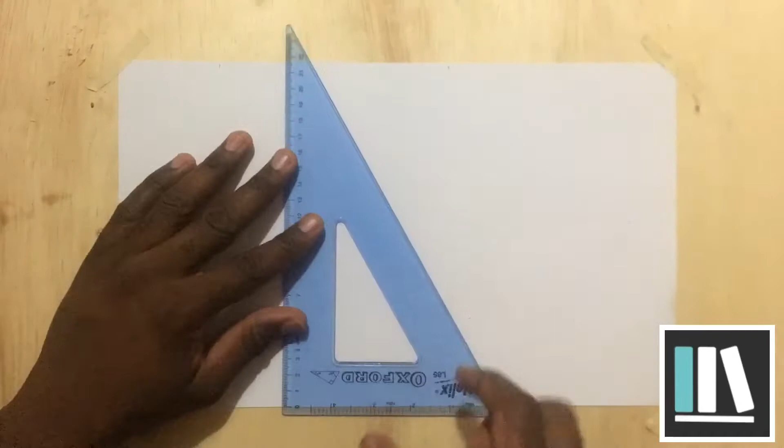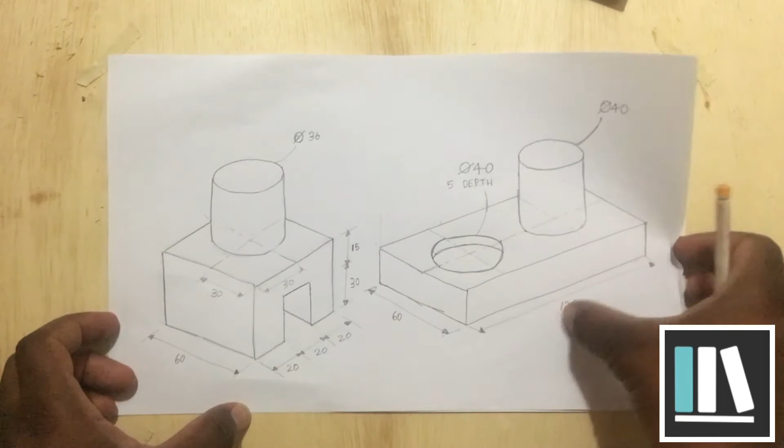Okay, so these are the drawings that we are going to look at today. We are going to start off with the drawing on the left, which is the simpler drawing of the two. So let's begin. I'm going to draw the simpler part of the shape first, which is the square portion.

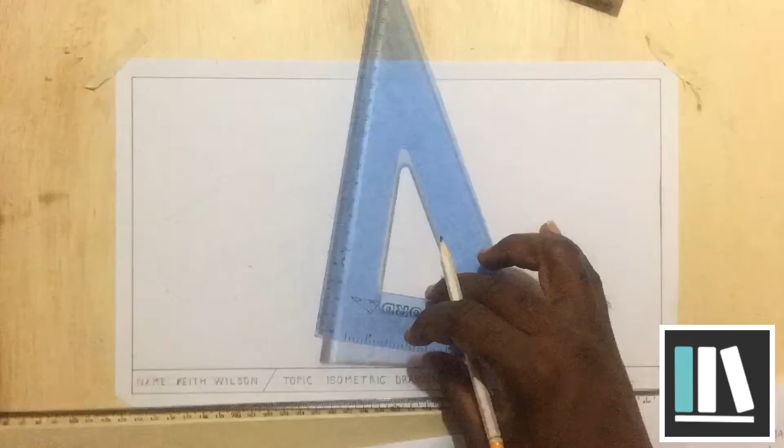So in the interest of time, I have drawn the shape. I have not demonstrated the drawing of the shape. If you want to brush up your skills on drawing simple isometric drawings, go ahead and watch the few videos before in this series. So let's go ahead and draw the circle.

Okay, so in the first two episodes of TD 202 that illustrated the drawing of isometric circles, I made reference to the fact that whenever you're drawing isometric circles, the first thing that you should do is to draw an isometric square that is equivalent to the diameter of the isometric circle, meaning one side of the square should be equivalent to the diameter. Then you would proceed to divide the square into 4 quadrants or 4 equal parts.

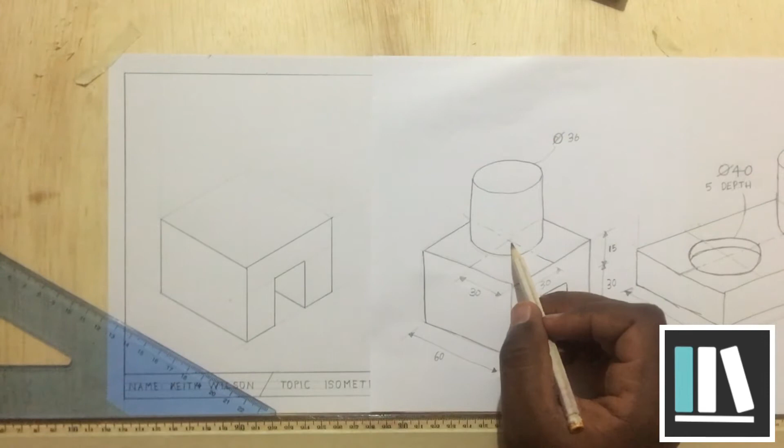In this case, the reverse will be done because, as you can see, if we are to draw the square, we would not know where exactly to position the square. But what we do know is the center of the circle, which would be the center of the square. So in this instance, we will proceed to find the center of the square first, which would essentially provide the dividing lines for the square.

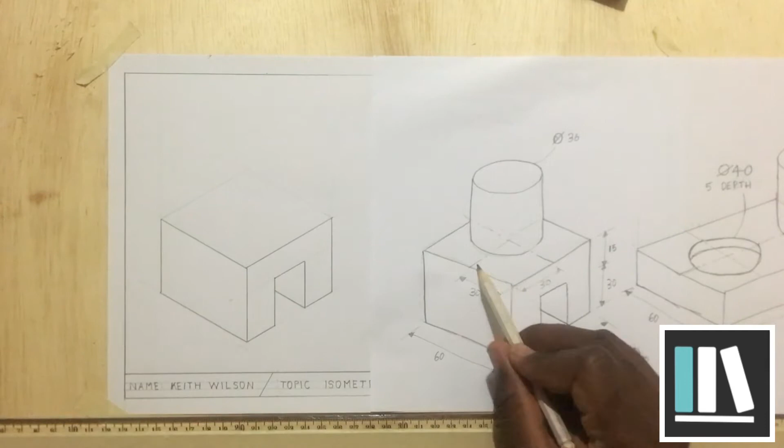So as I can see here, my center lines are 30 millimeters respectively from this point. So I'm going to measure 30 millimeters, which is around halfway. In some drawings, they may not give these measurements, and you would be left to assume that these lines fall in the center. These lines are not necessarily showing the center of the square object, they are just showing the center of the circle. I'll explain why that is.

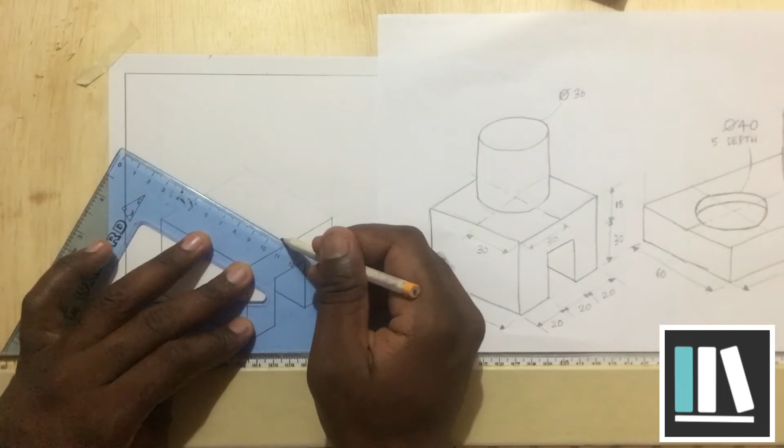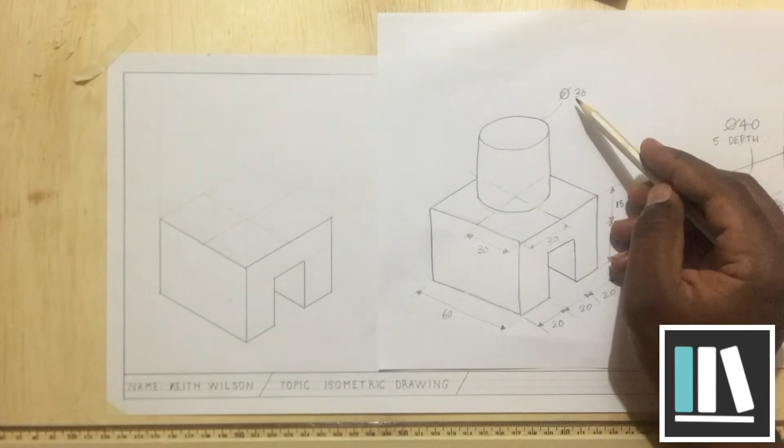So once I have established the center of the isometric square, I will now proceed to draw the isometric square. Now this is what you should do when you have the center. From the center, since the isometric square should be 36 millimeters in diameter, meaning one side of the isometric square should be 36 millimeters, by the way, this is the diameter sign, you should measure half of that measurement from the center. So half of 36 is 18.

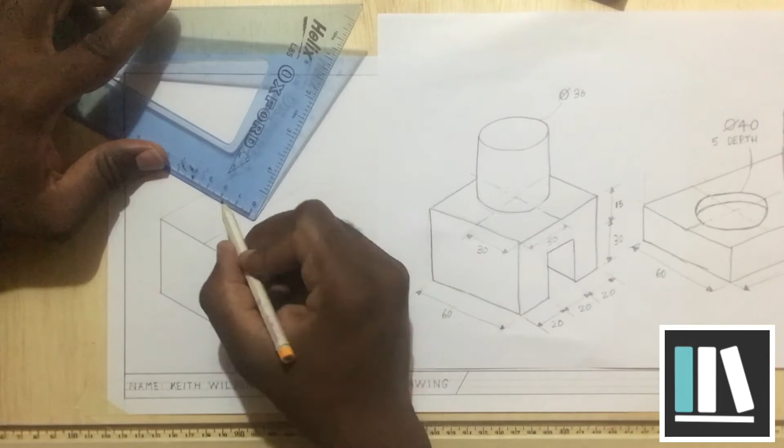And you are going to do this on all 4 lines branching from the center, so in all 4 directions, that is. Now this is where you have to be very, very careful that you're measuring exactly from the center. And you have to also ensure that you're marking off the points with precision.

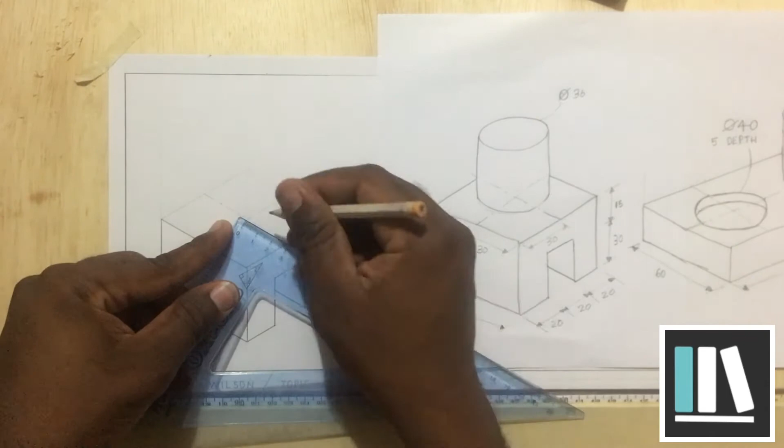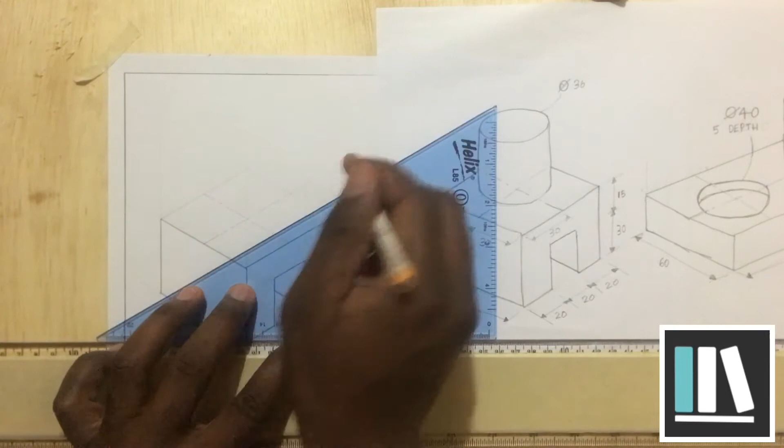Okay. Now that I've marked off all the 4 points, I'm going to use these 4 points to create the square. Please note I'm not connecting the 4 points. I am drawing parallel lines to the center lines that were established before. So parallel lines here, parallel lines here, parallel lines here, and another parallel line here. So if you notice, these 2 lines are parallel to this center line. These 2 lines are parallel to this center line.

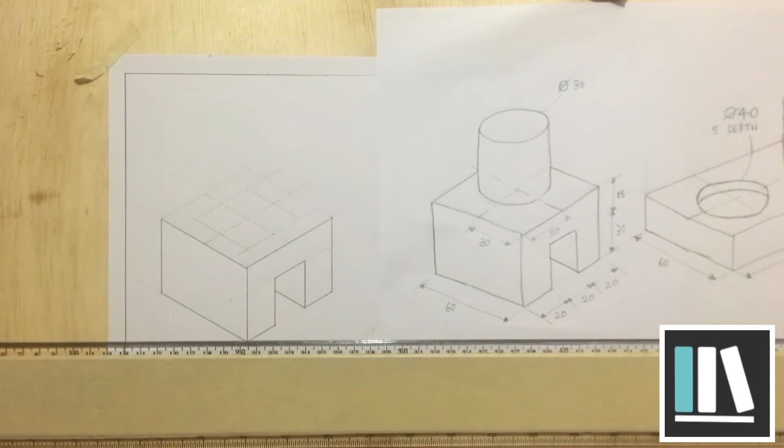Once you have established the square, normally the next thing to do is to establish the center of the square, or divide the square in 4 quadrants. But if you realize, that has already been done by virtue of establishing the center lines to begin with. So I can skip that step now and move on to constructing my isometric circle within my isometric square. In the last episode, I did just that.

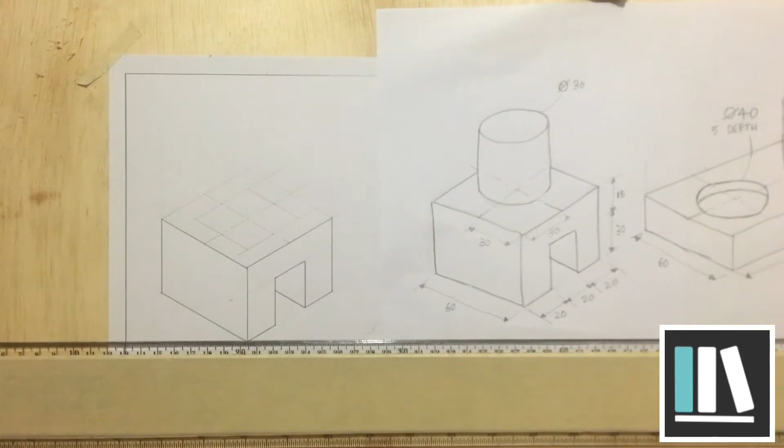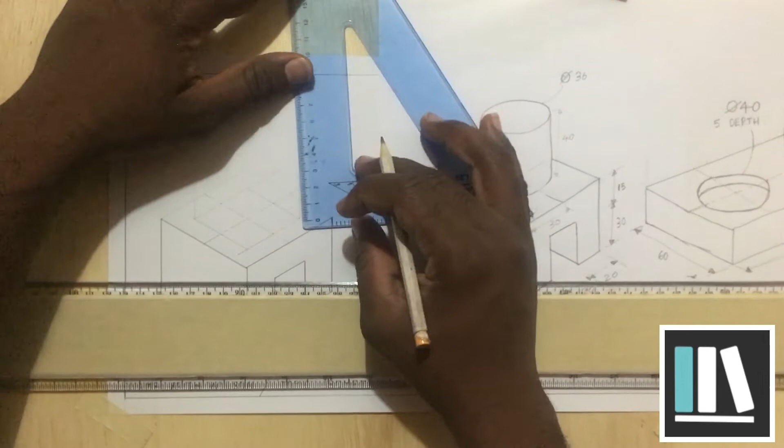This time around, as I mentioned in the last video, you can proceed to draw the top circle first rather than the bottom circle of the cylinder by projecting the lines upwards for the isometric square. And I'm just realizing that I did not establish a height for the cylinder. I'm going to assume a height of 40 millimeters. Once I measure it on both sides, 40, I can transfer measurements to complete this cylinder.

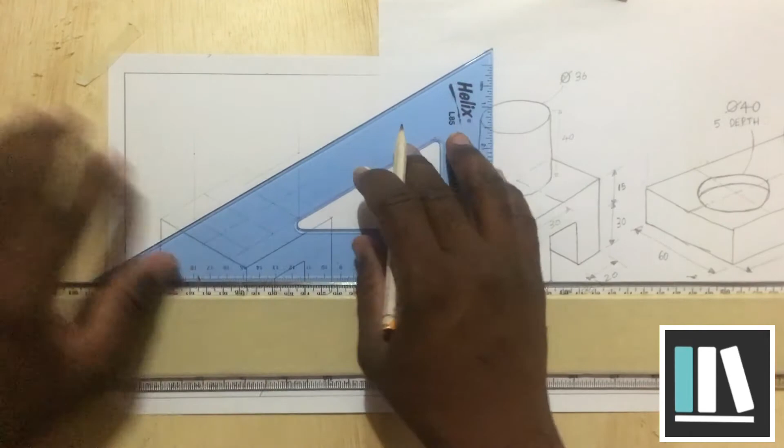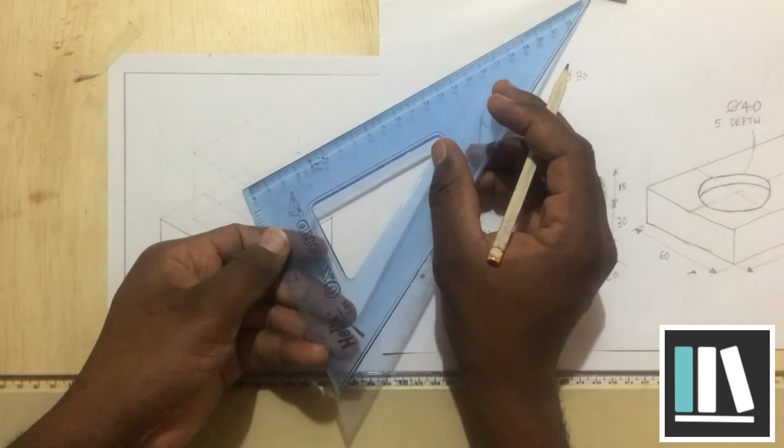This time around, the top circle for the cylinder is not going to clash with the bottom circle, as you can see here. Now for this circle, you have to establish the center, or divide the circle in 4 equal parts. So this is 36. Half of 36 is 18. And then 36. Half of 36 is 18.

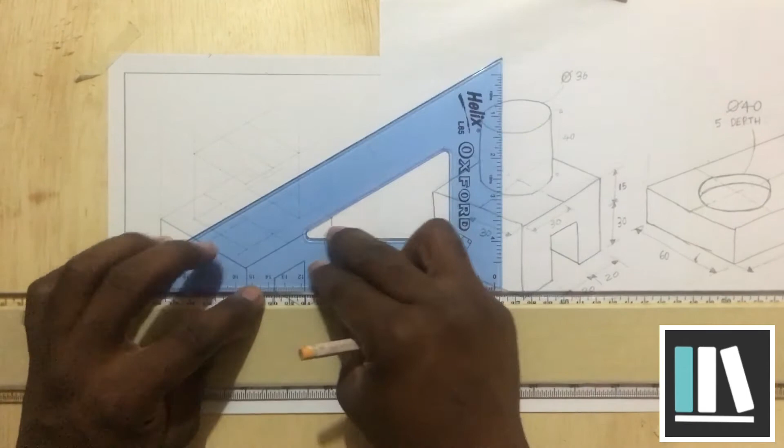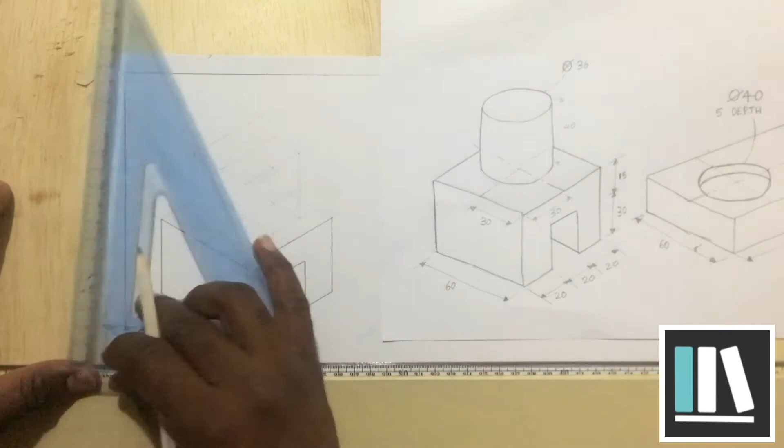Now, in the last episode I used the A pattern. This time around I'm going to use the V pattern to demonstrate that it doesn't matter which pattern you use. So I'm going to firstly connect my diagonals, and it should be the longer diagonal that you're using. Then I'm going to draw my V pattern.

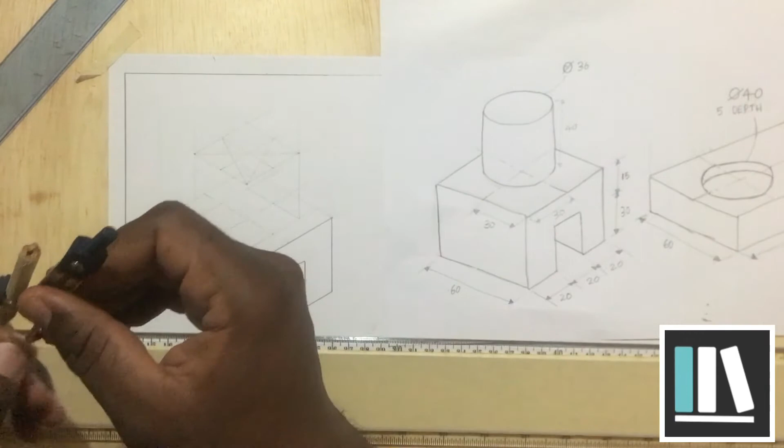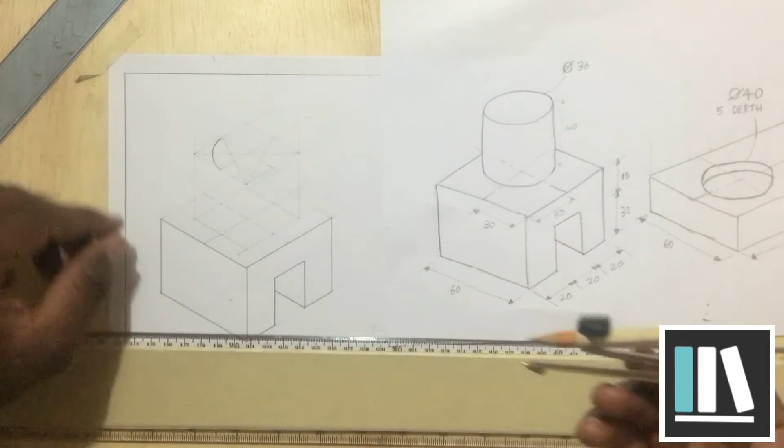Now these 2 points are the points that I'm going to use to draw the isometric circle at the top. I normally like to draw the smaller arcs first, then proceed to draw the larger arcs. Now, if you notice, the arcs are smaller in radius, which can be difficult to reproduce, especially if your compass is not up to par. This is where the bow compass will excel.

Seems like I'm not getting the compass to open as I want it to. The next thing to do is to draw the larger arcs.

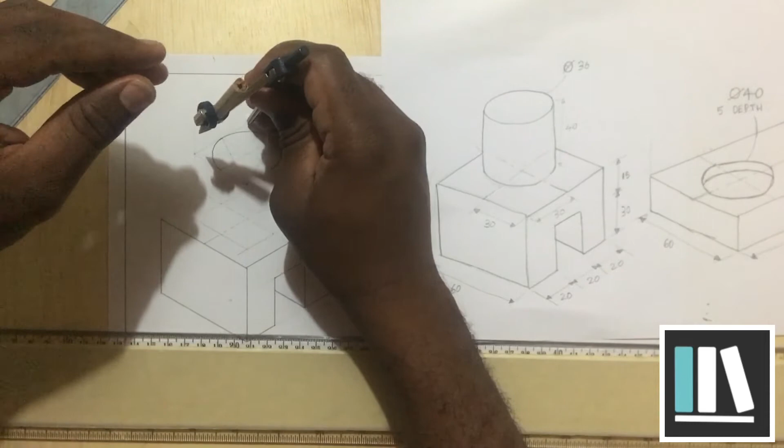And for this portion of the drawing, you can review the previous video in this video series that will show you how to draw isometric cylinders.

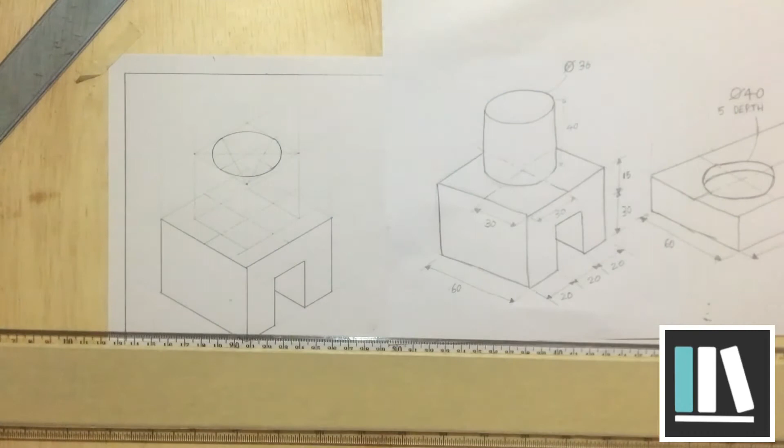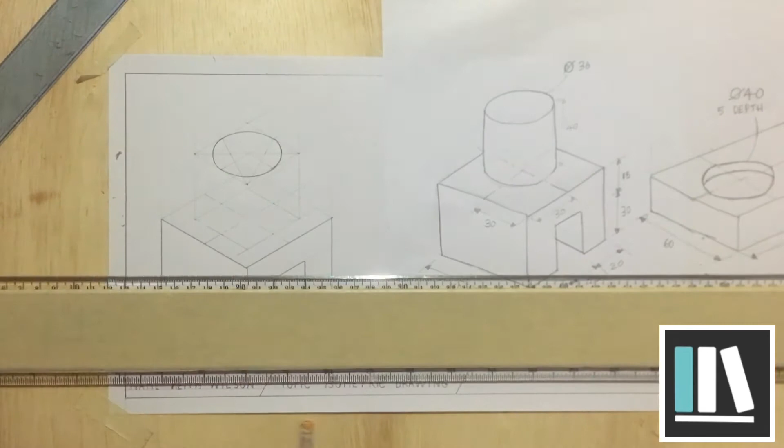Okay, so I am going to proceed to transfer down the measurements, but not before establishing the circle at the base. And I've drawn this line incorrectly. Let me redraw. I'm also going to use the V pattern, just for the sake of uniformity.

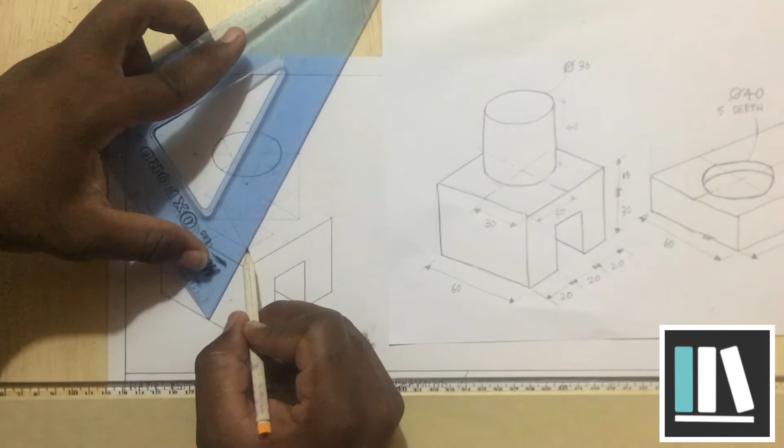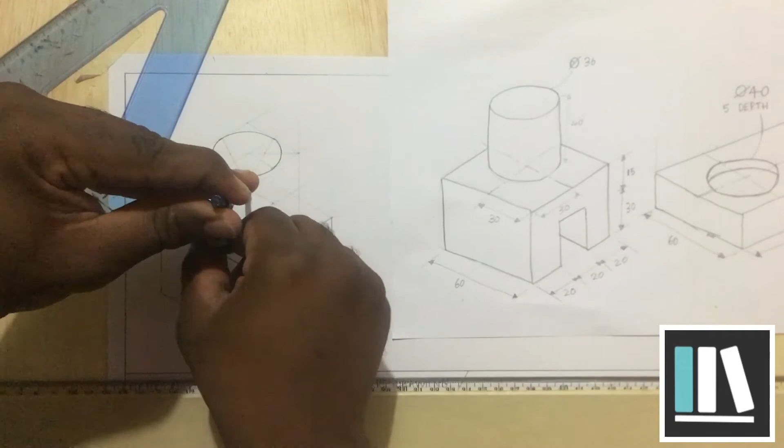Now, for this part of the drawing, I am only going to brighten the lower portion of this particular arc, but I still have to ensure that it would touch the upper point. All right, next side. Then I'm going to use the point at the top. And please note, I have no need to brighten all the arcs for the circle. I am only going to brighten the portion that I need.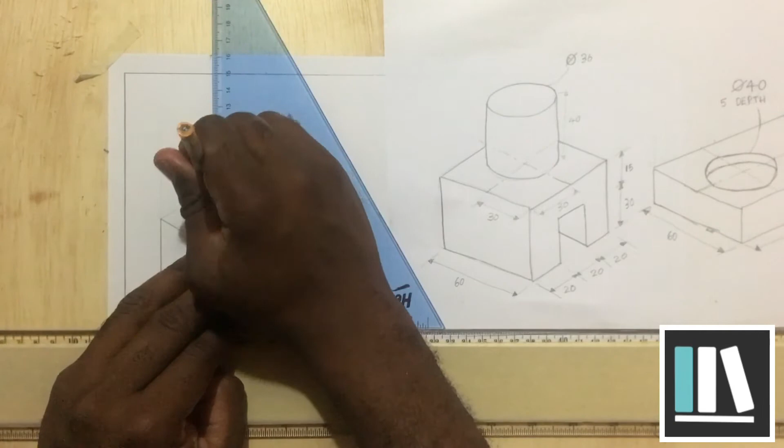Now I can proceed to brighten the rest of the shape. Now, if you notice, before drawing the cylinder on top, I brightened a portion of the shape beforehand. I am imploring you, if you are just learning, refrain from doing so until you have successfully constructed the drawing, because you may brighten a portion by accident that you may have to erase, which will result in your work being untidy.

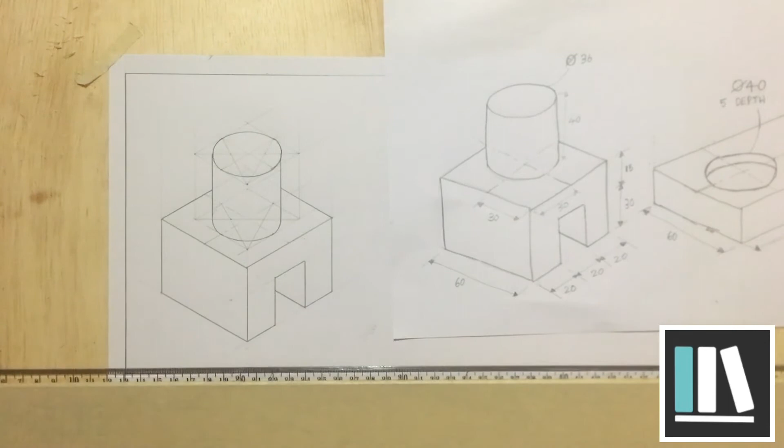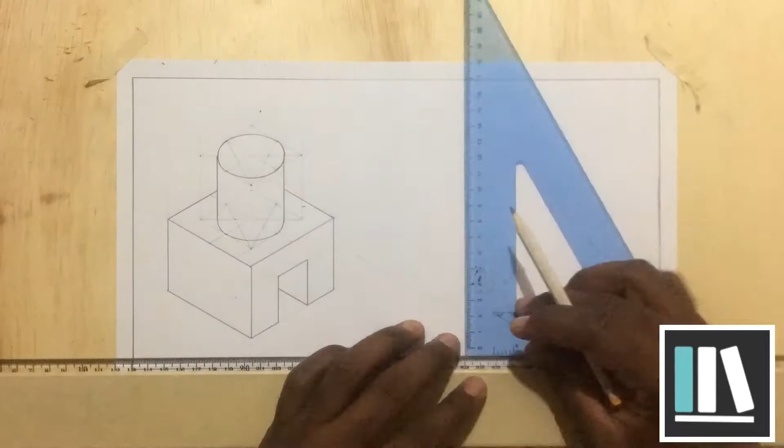Now this is the first shape. I am going to draw the second shape. So I'm going to quickly draw the base, which you guys should already know how to construct. So here is my second shape. Well, the portion of the shape that doesn't involve constructing isometric circles.

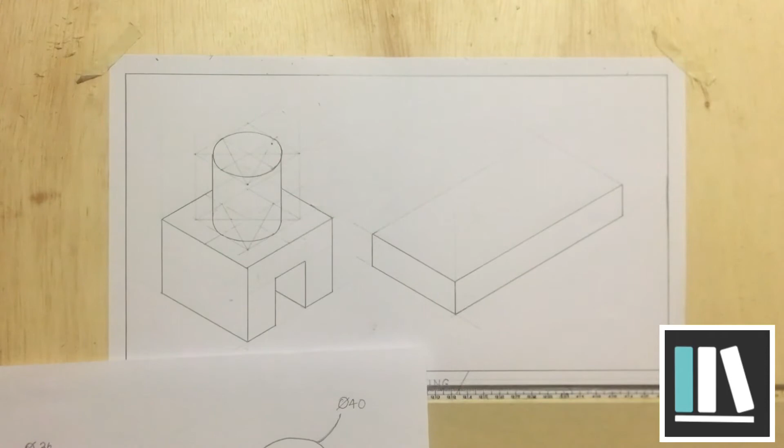Now, as before, the first thing I'm going to do in this instance, rather than drawing the isometric square, is to establish the center of the circle, which will essentially be the center of the square. And as I've explained before, we cannot draw the square first in this instance because we would not have known where exactly the square should be positioned. We can only determine the center of the square by finding the center of the circles as illustrated by the center lines.

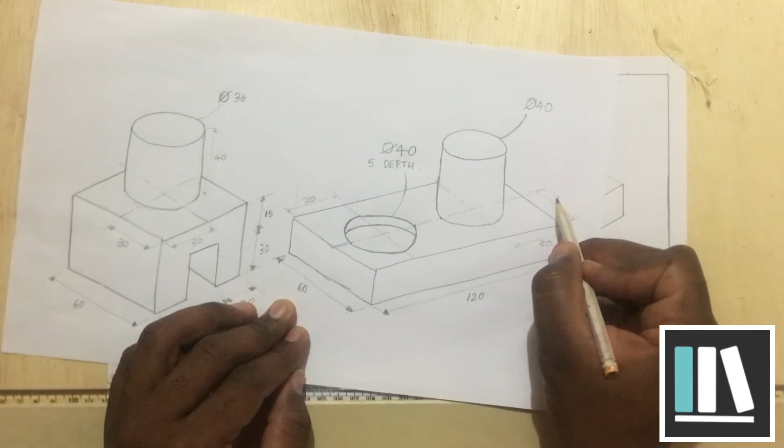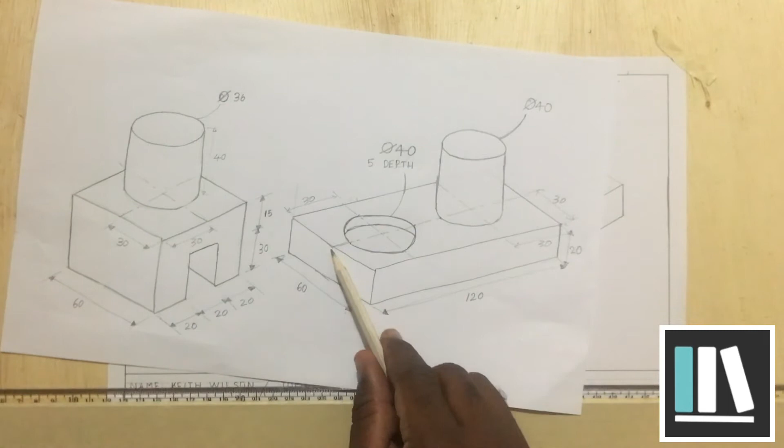So for this exercise, this will also be 30. As well. 30. Now, in instances like these, you will be given the distance of the center line from a particular edge. But as I've said before, if you are not given that distance, you must assume that the center line is splitting the object in half. For example, I could have left off this dimension, and you would have to assume that this center line runs through the halfway mark of the object, right? For the other side, it would have to be given.

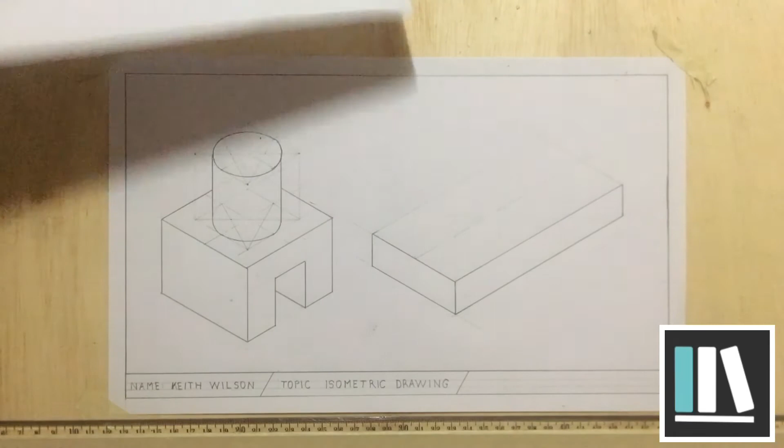Okay, so I'm going to proceed to draw my center line. So I'm measuring 30 millimeters from either edge, doesn't matter. It's equal, so I can do that. If it wasn't equal, then I would have to choose the edge where the measurement is showing. Then from both edges, I'm going to measure 30 millimeters. Then proceed to draw my center line.

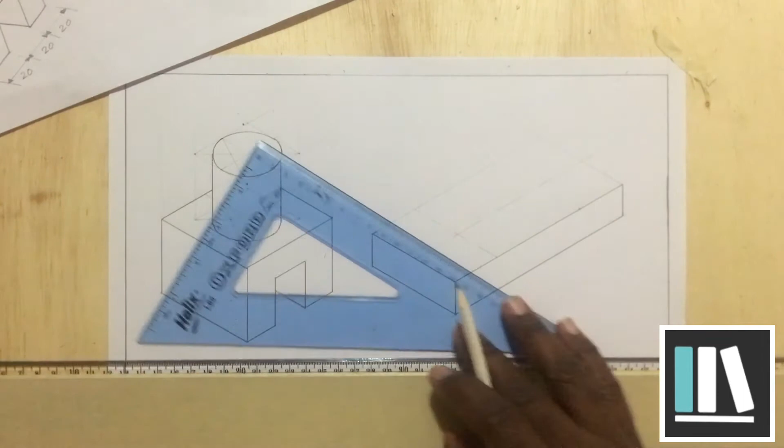Now I'm going to show you something, and this is what you should look out for when you are drawing. I am kind of drawing in a hurry, so as to make this video as short as possible. So in the process of rushing, this line is not going through this point, which it should.

This is an isometric square, if you realize, 30 millimeters, 30 millimeters. So any vertical line that is going through the shape would be the diagonal, which means it should touch the top point or the bottom point. And since that is not happening here, this proves to me that my shape is not drawn symmetrically or drawn accurately. Therefore, I may encounter some errors down the line.

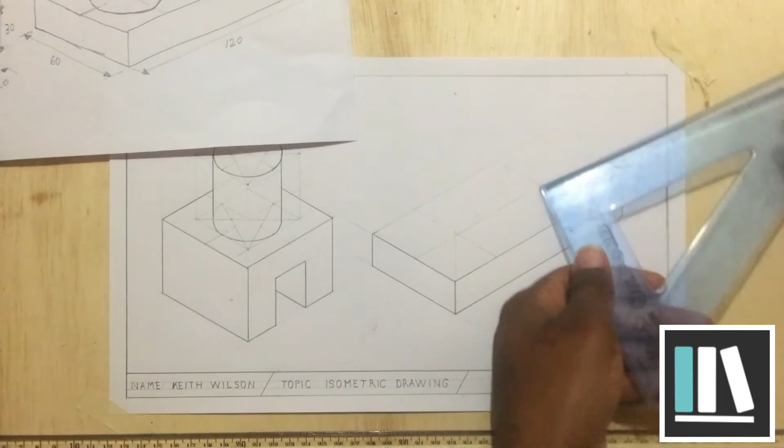Now that I've established the circle centers, just like the last time, I'm going to find the square that is supposed to surround that center. And since in this instance one side of the isometric square should have a diameter of 40 millimeters, I'm going to proceed from the center to measure 20 millimeters on either side of the center.

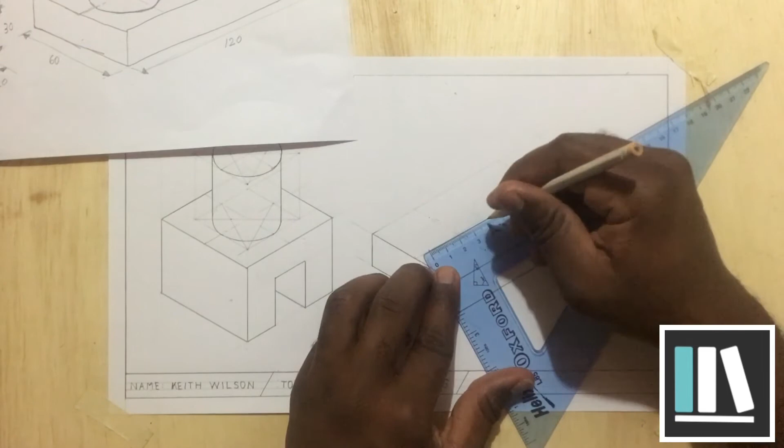I'm going to do them for both circles. So from this circle center, I'm measuring 4 points 20 millimeters away from the center. And I hope you can see my points. Once I've established my points from the center, let me put them a bit brighter so that you can see. I would normally not brighten these points so much as they will affect the drawing, but I want you guys to see them.

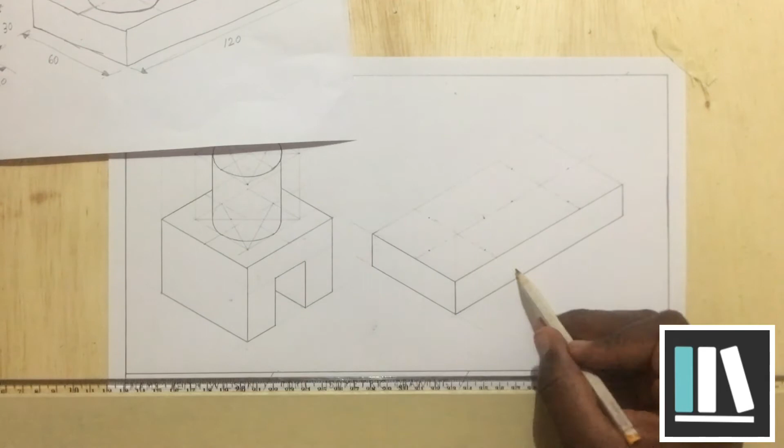Now that I've gotten these points, these 2 points will be parallel to the center line, while these 2 points will be parallel to this center line. Please refrain from connecting the points to form the square. So I'm going to draw parallel lines. And since I have the set square in this position, I'm going to go ahead and do these as well. Flip.

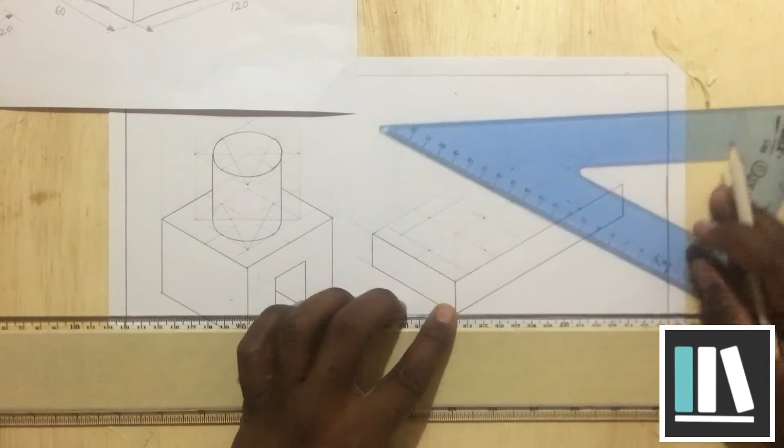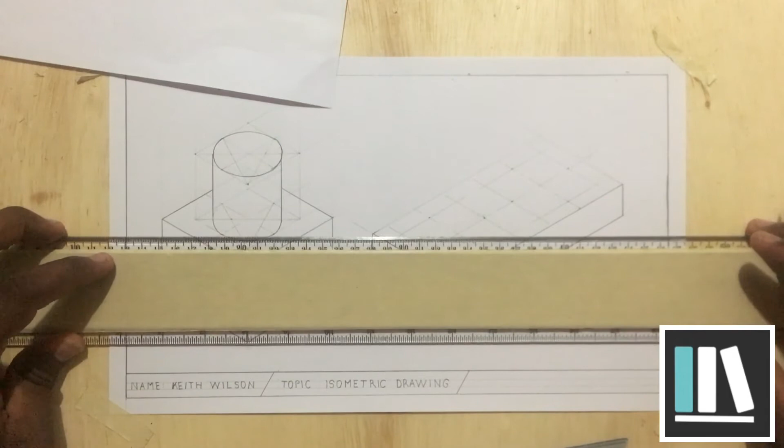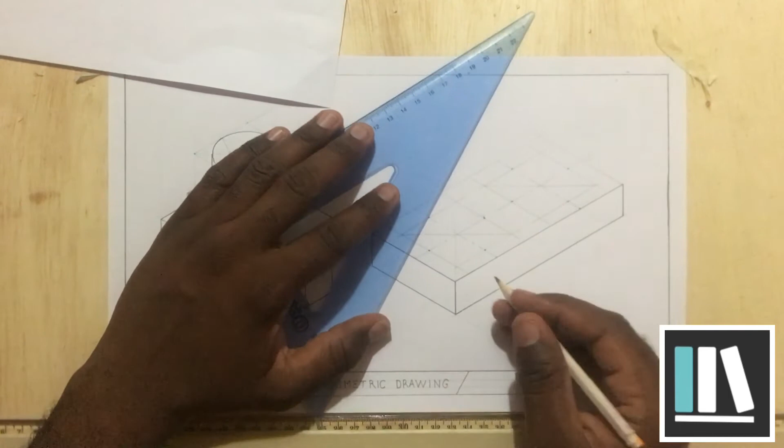Okay, now I have one square, I have another square. I can now proceed to draw the patterns. This time around, I'm going to use the N pattern that I was telling you about. So, I'm drawing my diagonals. I can draw them for both. Right? This is drawn incorrectly.

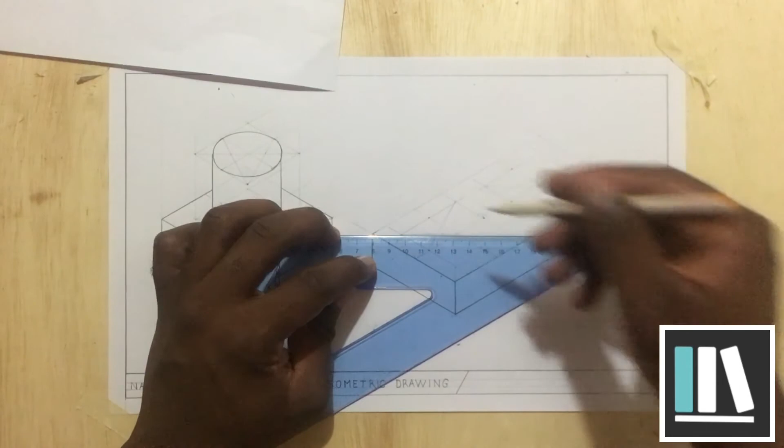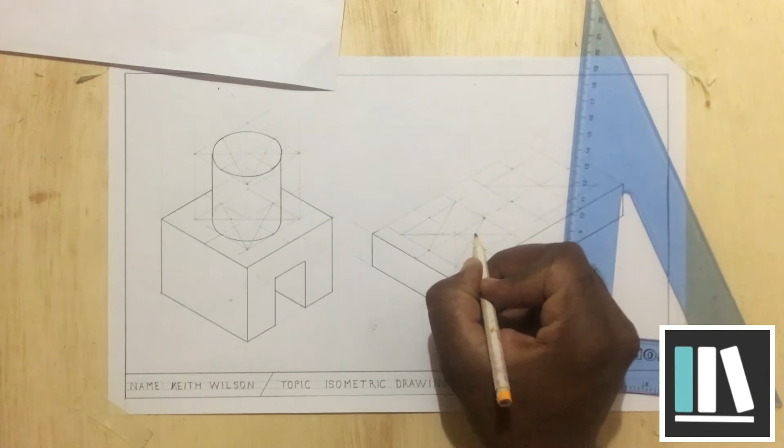And as much as possible when you're drawing, please refrain from drawing double lines. I'm struggling here at the moment because of the lighting. The shadow is blocking my vision. Now you can see the N pattern here. Now these are the 2 points that have been established. I'm going to do the same thing here. Now, in drawing the N pattern, this line will not be necessary. I'm just going to draw it just to make the N.

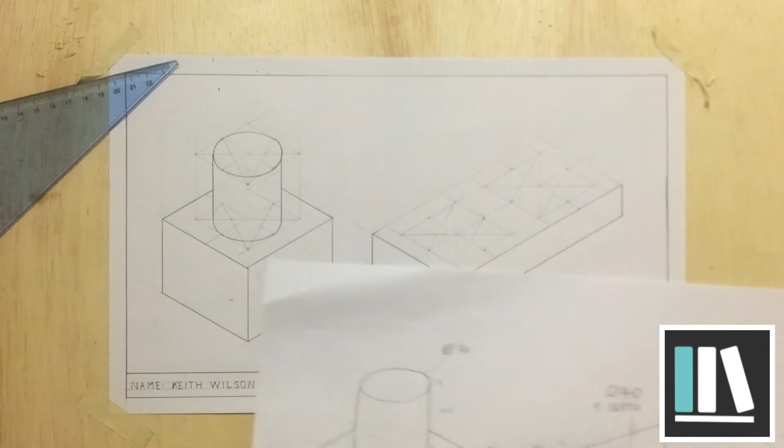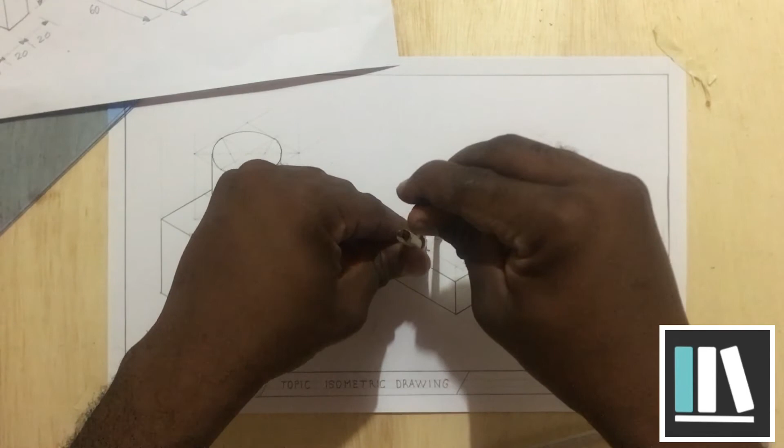Okay, so now that you have established the N pattern, you are going to proceed to draw the circles. Bear in mind that this circle, you don't need to brighten it, so you can replicate the method that I was showing here. I'm going to proceed to draw the front circle, or the circle that doesn't have the cylinder. I can brighten the entire circle in this instance. And as I said before, you don't have to start with the smaller arcs. You can proceed.

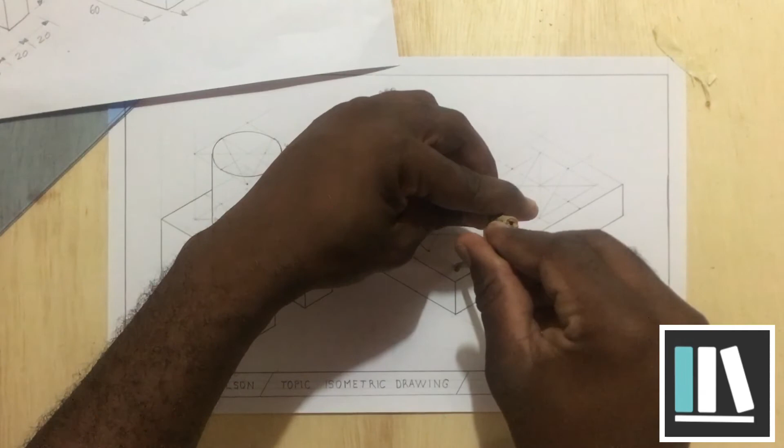So these points that I've established, where the lines from the N pattern intersect with the diagonal for the square, you use those for the smaller arcs, and you use the opposite points on the square to draw the larger arcs. So the N pattern really is only established to draw the smaller arcs. You don't need the N pattern for the larger arcs. I keep on saying circles, I should say arcs, because there are 4 arcs that are drawn together to form the isometric circle, or the ellipse.

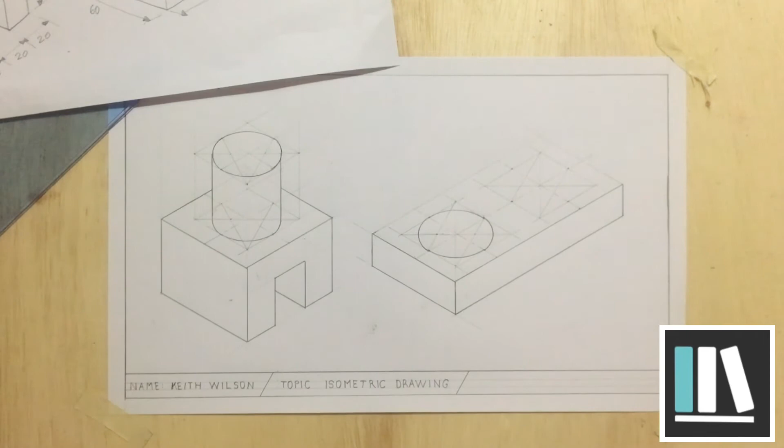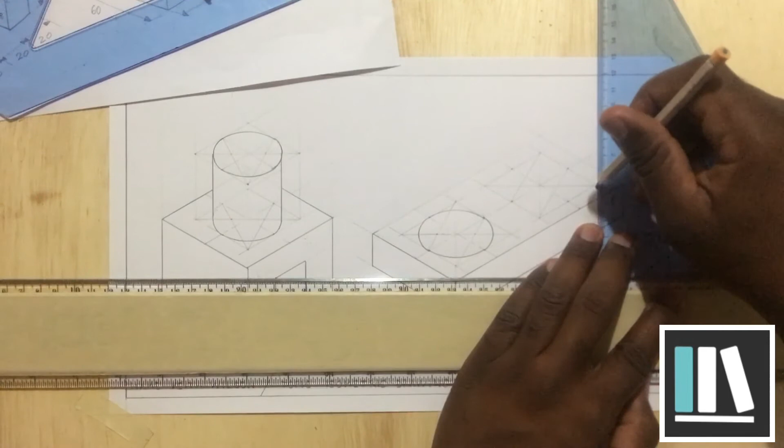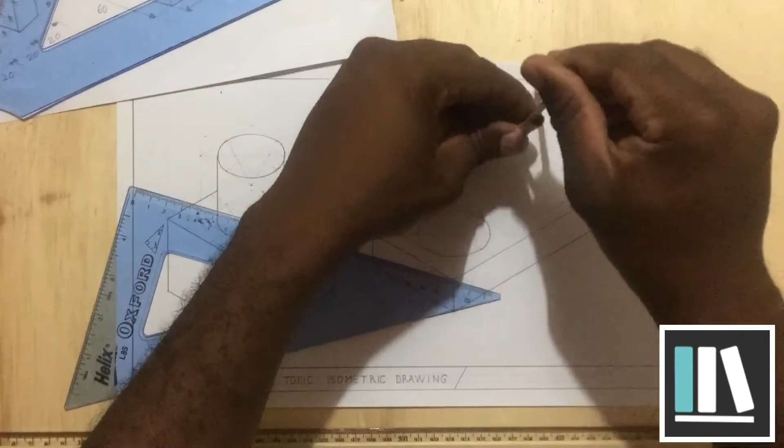Now I've drawn this circle, and there's something that I want to demonstrate, but not before drawing the cylinder at the back. I'm going to leave that for last. And I'm going to proceed to transfer these measurements. Okay, I'm just going to breeze through this because it's the exact method. Okay, so I've almost completely drawn the shape. This height wasn't given. I've just decided that it is 40 millimeters.

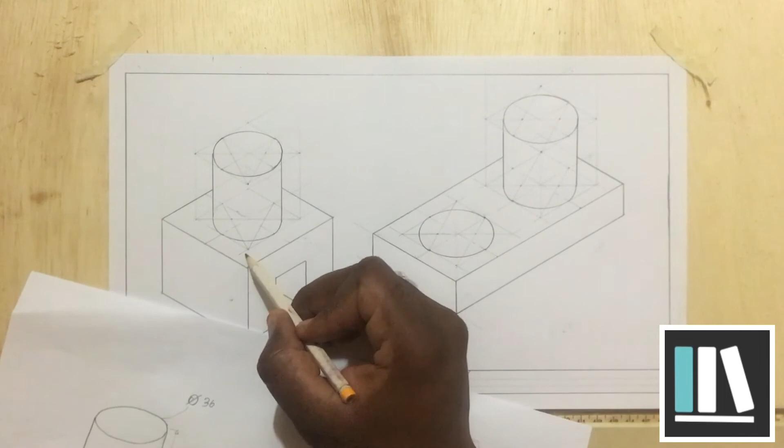Now, there's something I want to point out quickly. In drawing a cylinder, if the diameter of the circle is the same as the height of the cylinder, both isometric squares will meet, right? And they will not collide. If the height of the cylinder is larger than the diameter of the circle, there will be a space in between, as in the drawing yesterday. If the height is smaller than the diameter, then the squares for the cylinder will collide.

So you can use that as a guide to determine if your drawing is accurate. Now, let's proceed to draw the final circle. Now, we could have gone ahead and projected some lines downwards. Now, this is the depth. Because this is the depth of this hole, this circle shares the same diameter as the circle above.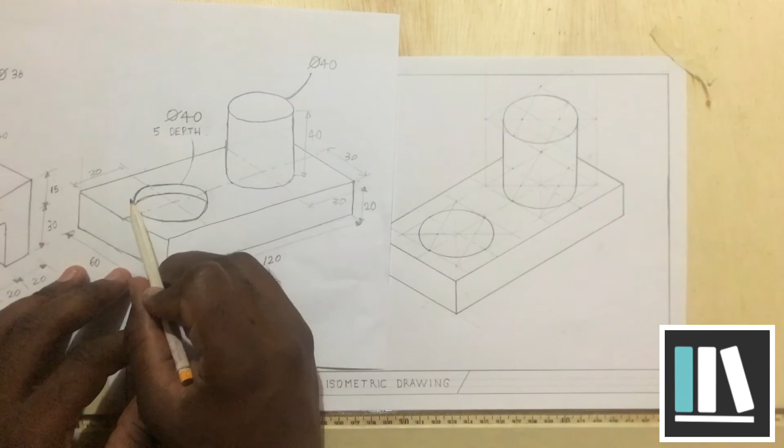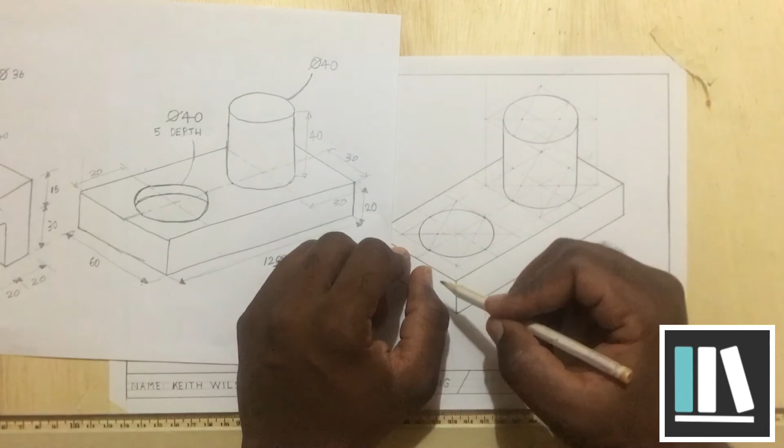So we could have simply projected 2 lines down from the edge of the square and redraw all this mess again. I call it mess because it will look confusing if you are to proceed to draw an entire isometric square, find the center, find the pattern to establish the points. I am going to do something that I'm going to refer to as the transference of points.

So I need this arc and probably the next two arcs beside to be transferred. Now, depending on how wide the circle is and how far down and the distance that you have to transfer, it will determine if you need the other two arcs. So let's go with the one that we need. Now, pay attention closely. We used this point to draw this arc.

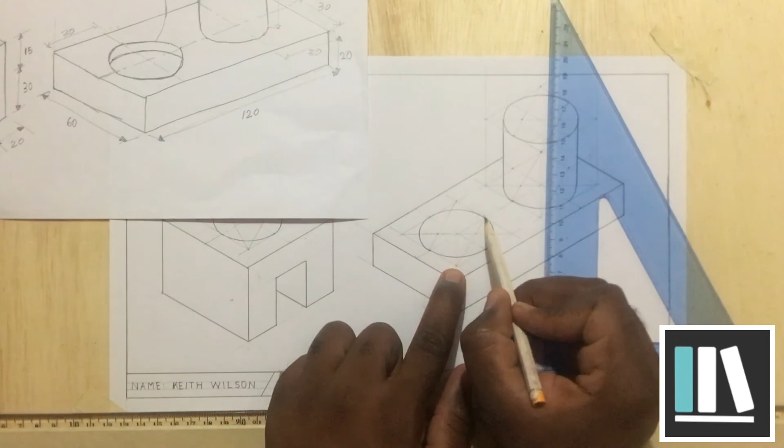So since this arc is 5 millimeters lower than the arc above, this point that was used to draw this arc must also be transferred 5 millimeters below, right? And you can just open your compass to the same radius that you used to draw the top arc. It's the same arc but lower.

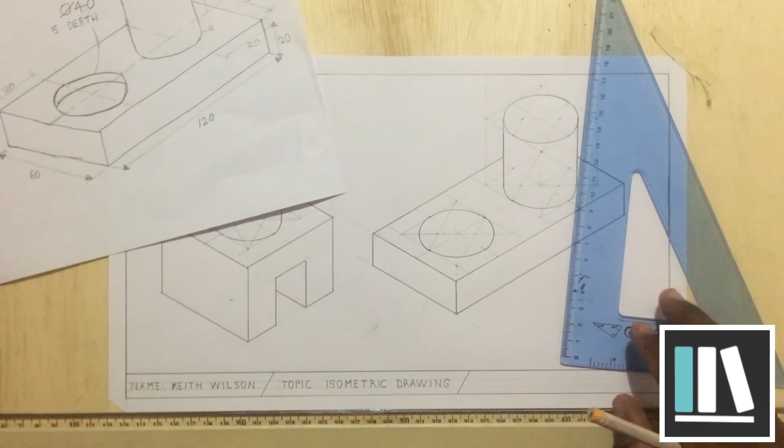However, before you proceed to draw, listen carefully, you have to know where the arc will start and stop. Since it starts here and stops here, these points must also be transferred down. You don't have to measure these points because the arc will touch the lines that you have transferred down. So notice I'm not using the original point, I'm using the point that I've transferred 5 millimeters down.

I'm going to start my arc on the lines that are projected, and end it on the other one. So I started on the first line. So if you notice, this line that was projected down, this line that was projected down, they both touch the arc, right? So let me go through that again.

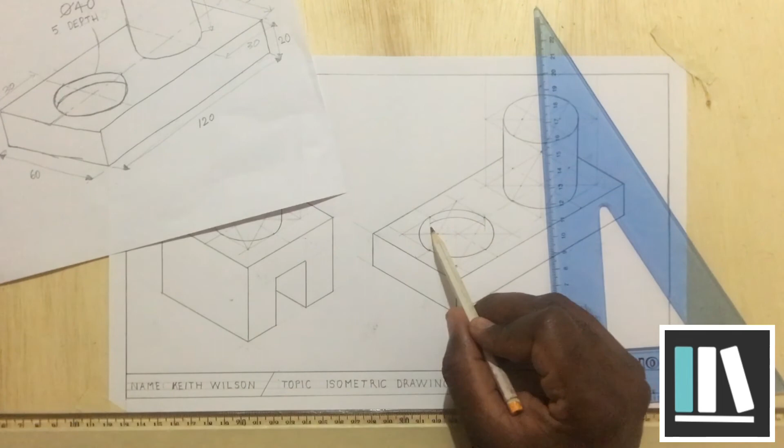I've used this point to draw this arc, and since this arc is 5 millimeters below this arc, all points involved in the arc will be transferred down. The first one, the second one, and the third one. The first point is where the arc starts. The second point is where the arc stops. The third point is where the compass point was when you draw the arc.

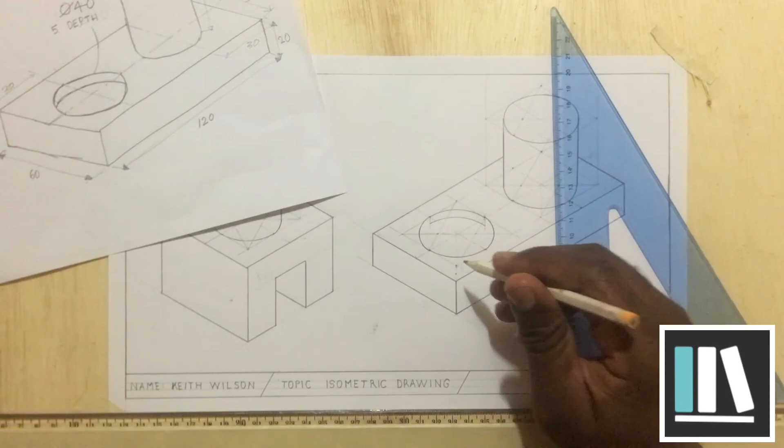So this point has to be transferred down 5 millimeters. That's the point that you place the compass. The other two, they will work out. So now that I've established my first arc, it's time to establish the other two. Now, the same principle applies.

I am going to transfer, this point was used to draw this arc. I'm going to transfer this point downwards. Also this point, because it was used to draw the other arc. I have to measure. Whenever I'm dealing with the compass points, I have to measure. Whenever I'm dealing with the points where the arc starts and stops, I don't have to measure.

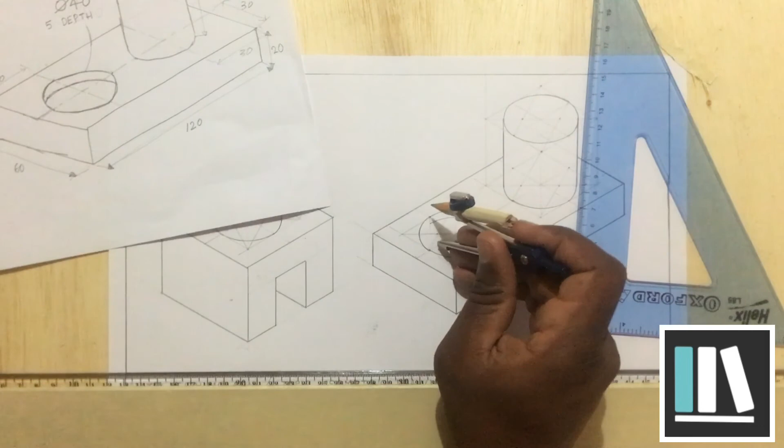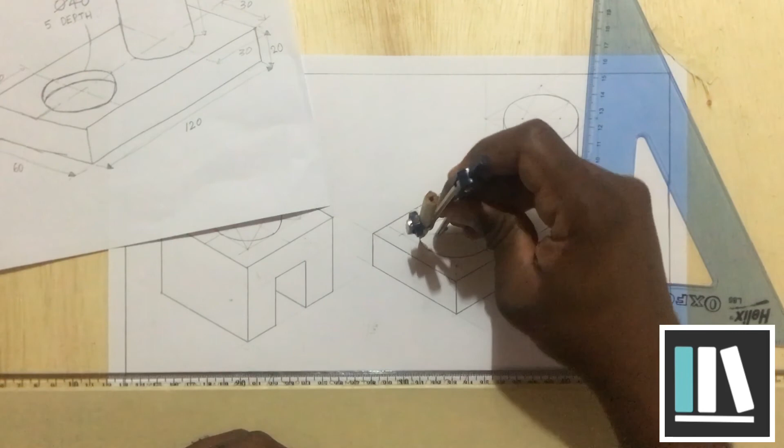So now I'm going to open the compass, place it at the new point, then continue the arc. So it's at the new point now that I've established, the 5 millimeters below the original point. And if you notice, it's the same radius. It is set to the same radius that was used to draw the first arc. Now this is the last.

So rather than drawing this shape all over again, I've just simply transferred the measurements of the first circle to draw the second circle. Remember, for each circle for the quadrant, you have the point where the compass is placed, the point where the arc starts, the point where the arc stops.

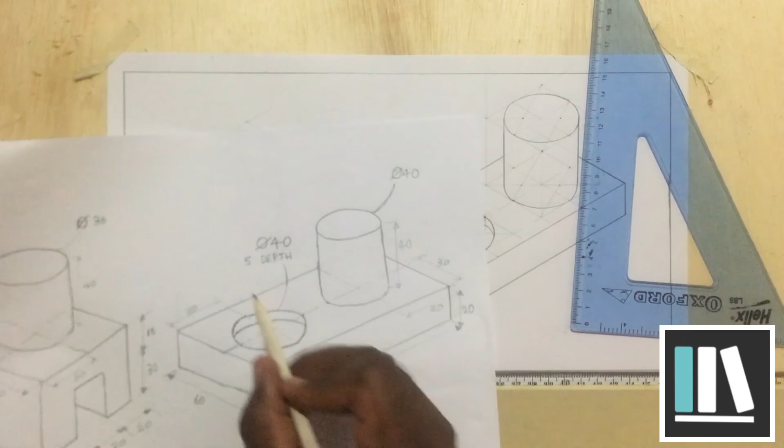Now, those are the 3 points that I'm transferring for each arc downwards by 5 millimeters. So I'm essentially drawing another circle 5 millimeters below. So there you have it. I hope you have grasped the concepts that were taught in this lesson.